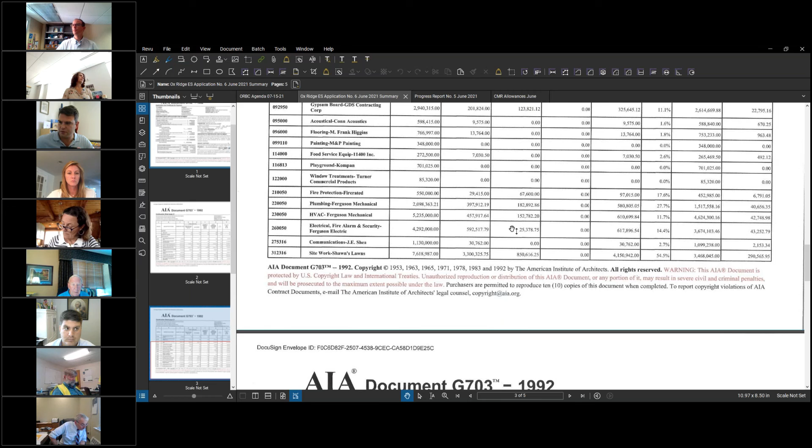Site work, Shawn's Lawns, they've been doing sanitary sewer, storm, backfilling, and that's pretty much it.

Just note on the very first page, it says a summary of the change orders through June was $75,195.

Okay. Is that the amount that has been submitted for Dr. Adley to send over to the state?

Yes, the majority of it is. I would have to check if there was a couple that got processed after that. But I can find that number that got submitted to Dr. Adley. I'm not concerned so much as the number has a document of change orders, which we have to file with the state, but submitted to Dr. Adley for signature.

Yes, it has. Yes. Okay. Yeah, so I believe at this point I signed it, Dr. Adley has it, and then from there Slam has to sign it, and then Jennifer Charneski will have to sign it, and then it comes back to us.

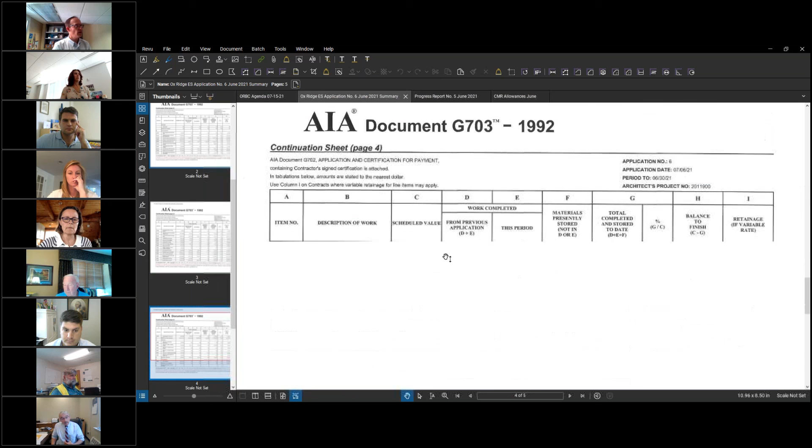And you file it with the state, David? We take care of it. We get it submitted, and then the next step is that in some period of time, anywhere from 1 month to 30 months, the state will review it and will render a response, and they may say, of this change, we have deemed the following amount ineligible.

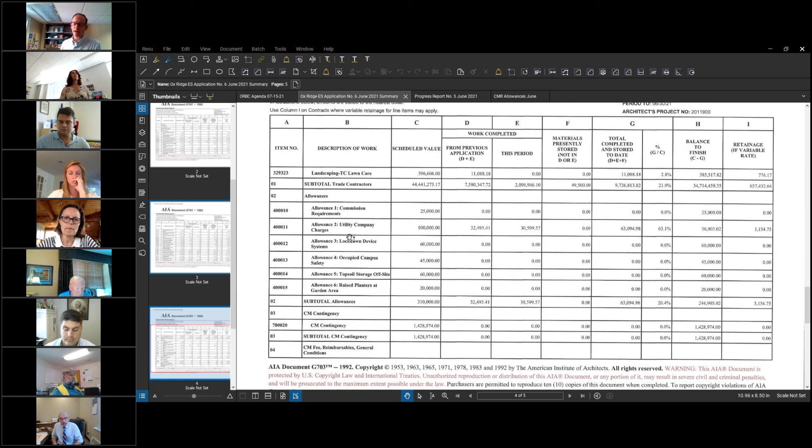Oftentimes they'll come through and say, well, you said all of the changes were eligible, but we deem a portion of it ineligible, and they'll go through the backup and try to find some reason to say it's ineligible. So when we get that letter, the superintendent gets the letter, we will formulate a response back to the state, either agreeing with them or in defense of that, and we'll copy you on that when we send it in.

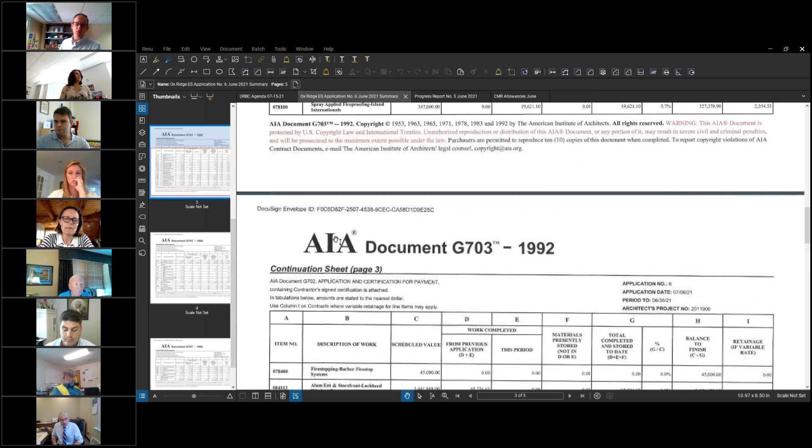But the key is to get the change order signed through all the people and in before that 6-month rule. So I think the oldest date on one of those changes is sometime in February. So we have about a month to get that change order fully signed and into the state to make sure we're within the 6-month rule.

Okay, is there a single person that's responsible for shepherding it through all the signatures and getting it out? Well, I guess on our end, I would say it would be George, but again, I'm not sure who's the one that will get it from Dr. Adley to, say, Jennifer or to Slam. It's somehow we have to get it circulated through everyone and back to us.

Does it have to go to Slam before it goes to Jennifer? It can go in any order, to be honest with you. Okay, that's all I wanted to know.

Well, Mike's on the call here, so I'm going to say, Mike, would you make sure that Dr. Adley gets it over, signs it, and gets it over to Jennifer Chernesky at the town? I sure will. And then that way we can keep the process moving, and then we'll get it back to Slam, or just get it back to you, David, and you'll get it to Slam? I don't care. Just however, I'd say if you get it to George, he can get it to Slam.

Okay, fine. All right, so I'd like to have this payment. Are there any more questions about this application for payment from the committee? If not, I'll entertain a motion to approve the payment of application number 6 in the amount of $2,185,526.54. Do I have a motion?

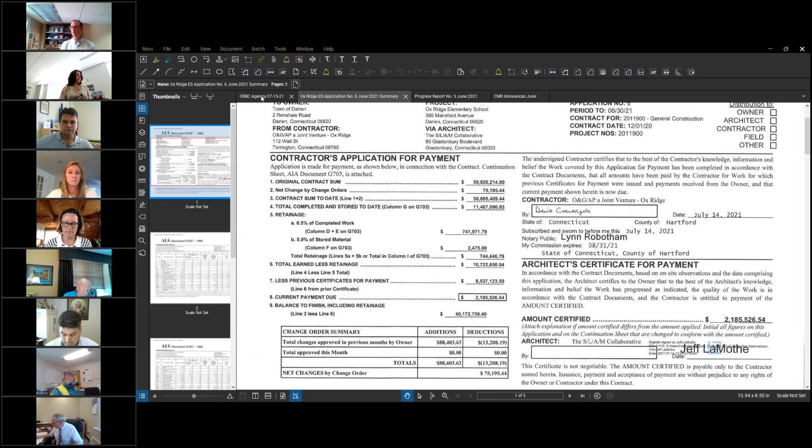Okay, the next order of business is to quickly go through the project update.

It's not going to be in the project update, but the fact that we had one torrential rainfall last Friday, 6+ inches of rain in 6 hours, a record in Darien. That was the official number. But I guess we recovered from that. We had some foundation wash away, but not too much, which is being taken care of. Yeah, that was repaired yesterday. They finished that up. Okay, good.

So that's all set. So let's focus on this report then, George. Okay, just to go through, we're projecting 29% complete in the building, 54 in the site work.

Allowances, we have funds available, 196,061, and probably have a discussion later about the allowances, and then our contingency remains at 1,428,974.

Before you leave that page, George, I just wanted to ask a general question. If you can make that page a little larger, great. In the middle of the page, there's potential and approved budget revisions, and below that, there are potential and approved contract changes. Could you please, or could David please explain what the differences are here?

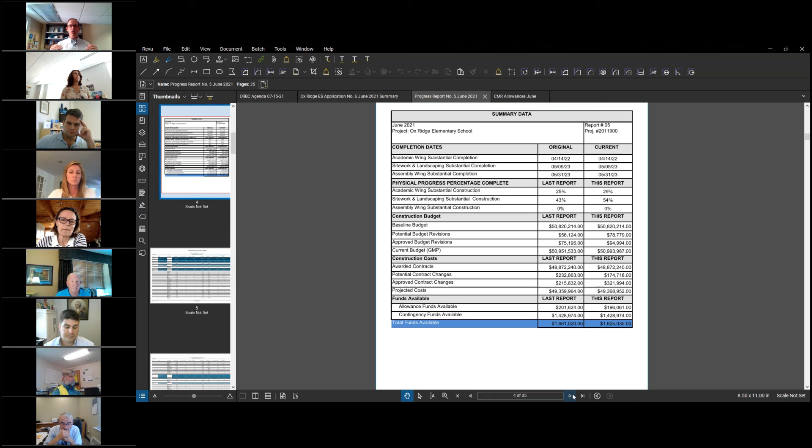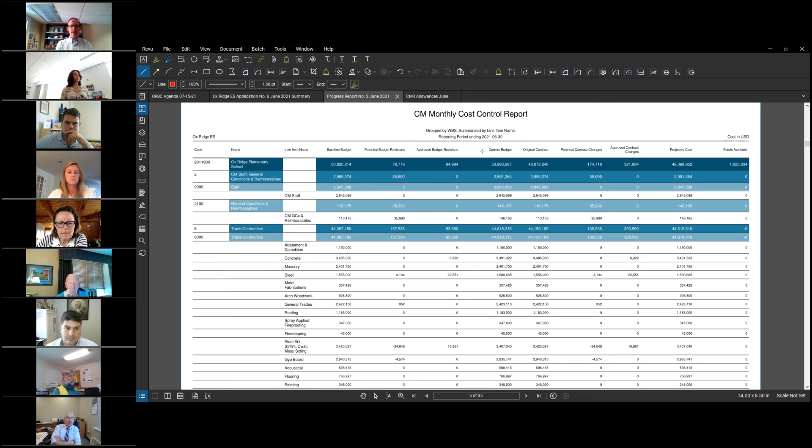If we were to go to the next page there, George, just quickly show where the money will move from. So where George's cursor is, there's a column called original contract, right in the middle of the page, there's a column called current budget and then original contract. If you were to draw a vertical line down that page and take the left-hand side, that is our contract with the town of Darien.

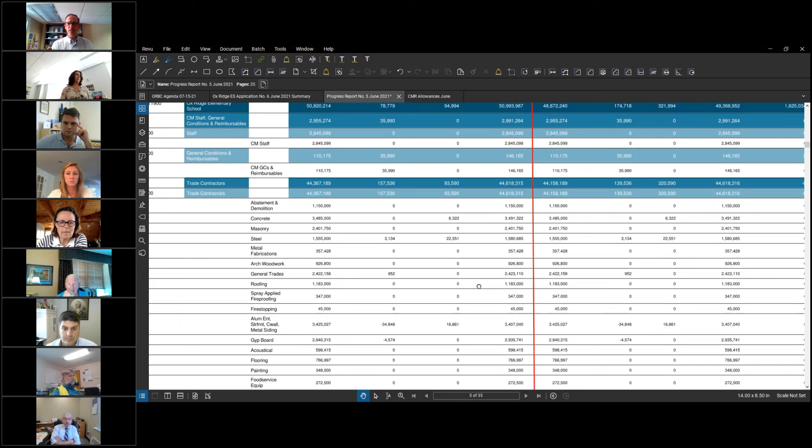From that line to the right where it says projected cost, the second to last column on the right, that is what we have contracted with our trades for and what you've contracted with us as far as George, myself, Brian, all that stuff.

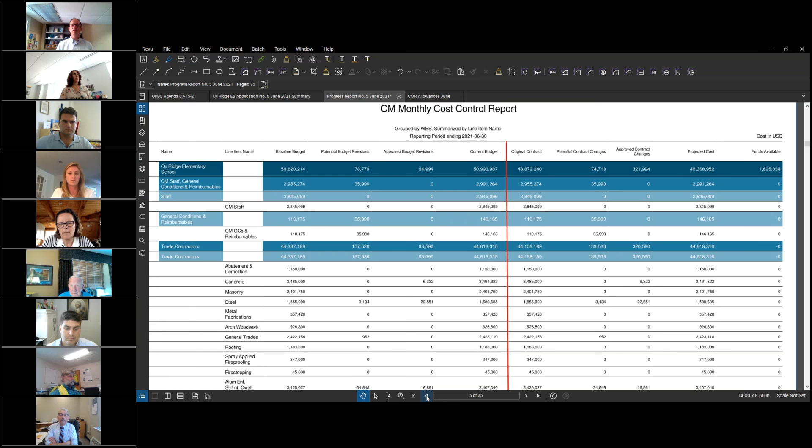And then the very last column is funds available. So what that does is it takes our current budget, which is the column just to the left of the red line, and it takes the projected cost, which is the second to last column from the right, and subtracts the projected cost from the current budget, and that's your funds available, which if you look at the top right corner, that 1.625, that's the funds available within our GMP, and that is the amount of the allowances and contingency that we have available.

To Nick's point, since these contracts include allowances, that's why you see that number going down. This number would go up, but these would stay the same, only because the allowances are part of that GMP. In other words, our contract with you won't go up with these allowances because they're all part of our GMP.

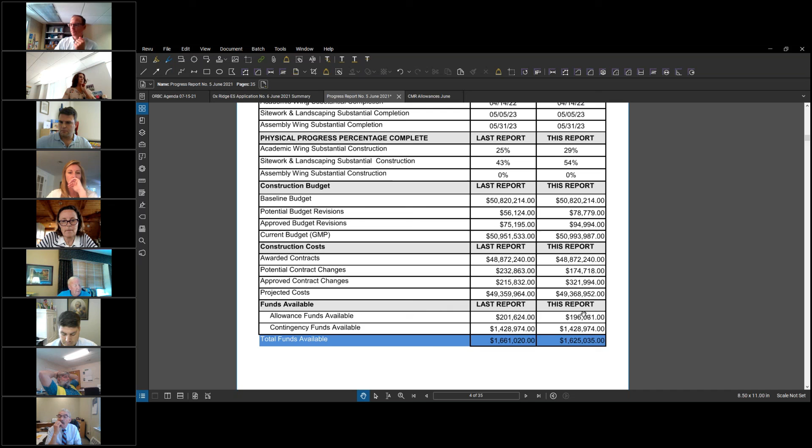Well, I hope that was helpful. I hope the rest of the committee found it helpful as well. That does help explain it. Okay.

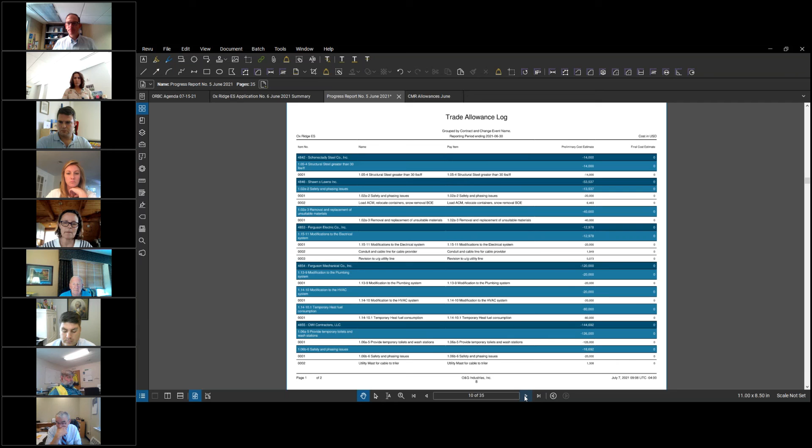Just going through cost schedule impact items. Primary electrical feed - we've kind of worked through all the bugs, if you will. Eversource agreed to install a new primary feed to the existing transformer. That's due to the fact that they couldn't shut off the direct burial cable, so in order for us to do our work safely...

We had to put in 2 vaults and then a conduit, and Eversource is going to have a feed to that existing transformer. On that part of the work, we also moved the pole over across Mansfield Ave so we don't have to put in 2 switch boxes, and then we're going to cross Mansfield Ave and bring the cable down to the new building. That work started yesterday, going from the switch vault down below the road and up the road.

Water main revisions - we made some revisions from the 8-inch. The original contract actually showed an 8-inch line going down the middle of the driveway, and showed tying into the existing 4-inch line. Obviously we couldn't do that, so we had the option of tapping a new 8-inch line into the 16-inch main in the street, or running separate 4 and 6-inch lines down the street.

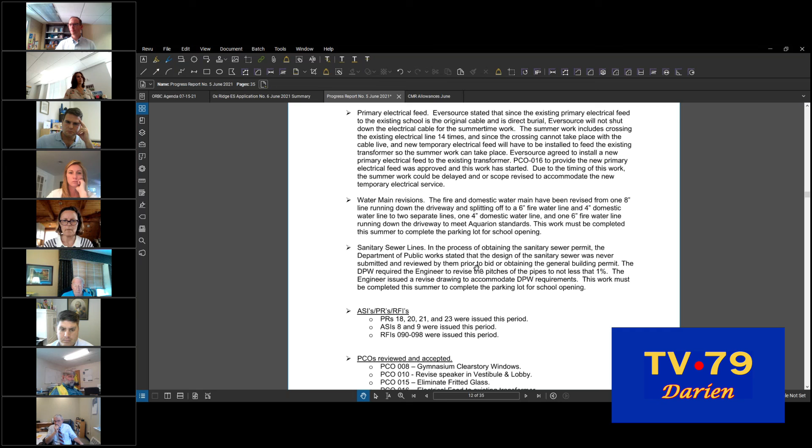And then the sanitary sewer lines - I guess last week or the week before, when the building inspector came out, he mentioned that we needed the sewer department to inspect all the sanitary sewer lines. So when we reached out to the public works sewer department, they said we needed to pull a permit, and also that they hadn't seen the design drawings. So we gave them all the design drawings, and they had a couple of issues with that, and made some revisions to the piping because there were some laterals that were less than 1%.

The town standard is 2% pitch on the pipe, but if you have extenuating circumstances like we do, where we have an existing invert in the pump station and also the invert of the new building, we couldn't achieve the 2%. So they said we could go to 1%, but not less. There were a couple of those runs that had to get adjusted to 1%, which meant adjusting the heights of a couple of the manholes. So we did get the permit Monday.

They've set manhole 5 the other day, yesterday, and we have about three pieces of pipe in now. So that's kind of started. Now the inspector, and maybe I'll mention it now, Kip, the inspector was out here.

It wasn't Ed Gentile, but a Darren he sent out to inspect. Darren's number 2. Darren told us he's going to look at all the pipe installing going in, and we're saying we're going to need him out here every day, even Fridays and some Saturdays, to inspect the pipe so we can keep moving forward.

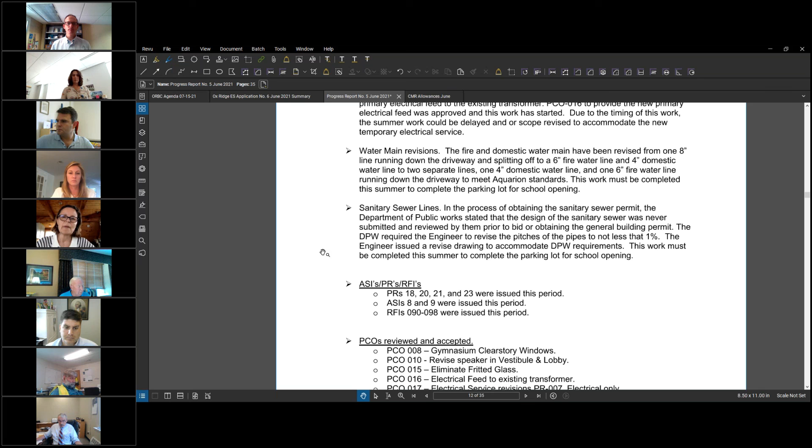This is Diane. I have a question, mostly for Amy, but also for you George, as to whether all these changes have had any implications on any site design. Does it change some elevations or landscape, natural landscape, or any of the parking layout or anything like that? I know there was talk at the last meeting about locating the tank in a location where it could be accessed, and I just want to make sure it was being coordinated through to the final design of the landscape, that everything was being coordinated.

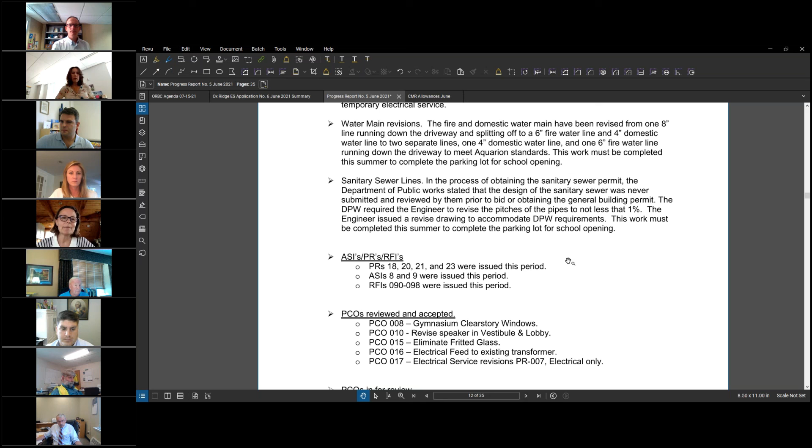Yes, it is, and this is all underground, so it doesn't affect landscaping or parking lot layout at all. All of this stuff is all underground. And everything gets run through the design team anyway, all of these changes, for approval before anything goes.

The one thing that might have changed a little bit is where the fill pipe and vent pipes are on that tank that you mentioned, but that's very minor and it's further away from the building. It'll still be located in an island. It just might move north south, something like that, but still be located in the island, so it shouldn't affect any of the new parking or sidewalk or anything like that.

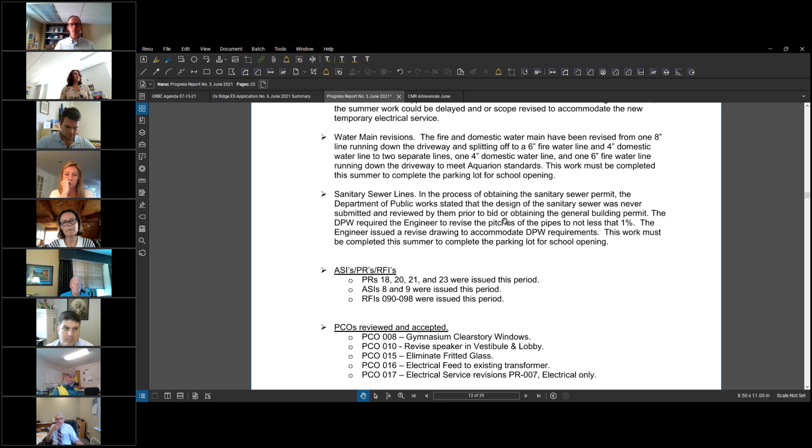And then the sanitary lines, those are 18 feet below the parking lot, and the water mains are 5 feet or so.

Yeah, Darren went down in that hole. I was surprised.

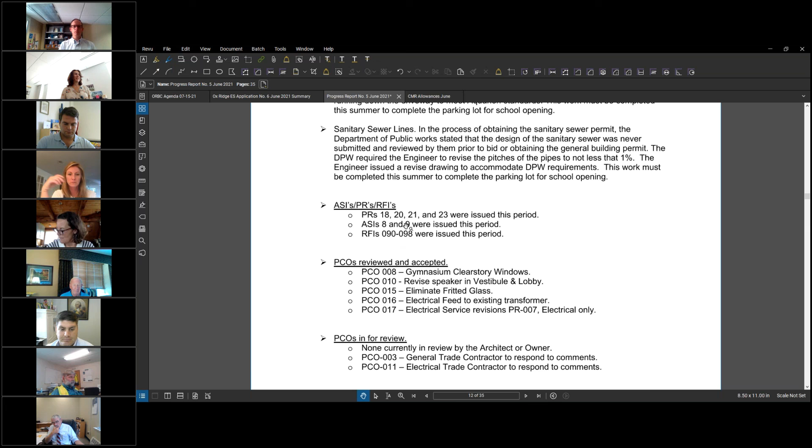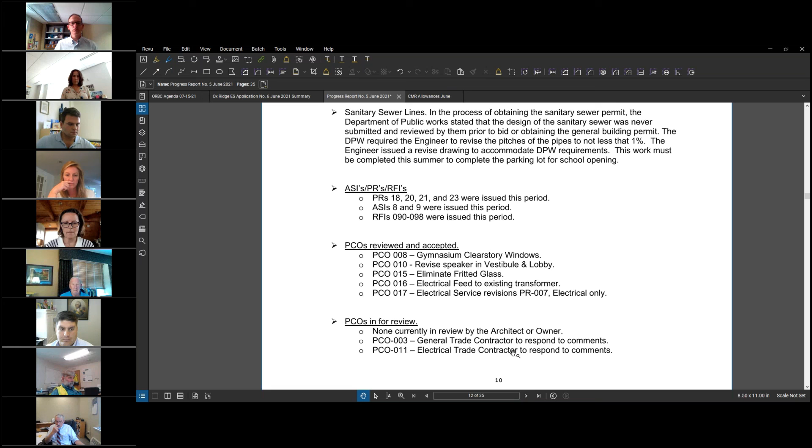So ASIs, just 4 proposal requests issued, 2 ASIs, 9 RFIs, but none that are outstanding, they've been answered and responded to quickly. So we're good. PCOs, we had 5 that were reviewed and accepted, change orders written, and then there's none currently with the architect or owner. There's 2 PCOs that basically got rejected, but they'll get closed out, just waiting on some responses from the contractors.

I would just like to add, for the committee to understand, one of those rejected potential change orders came from Ferguson, looking to put their hangers for the various pipes in the ceiling, with the hangers attached to the roof. It was going to save them time from putting in angle irons to hang things from. They went back to Slam, and Slam said no, the load on the roof has not been properly designed for using hangers as well, and it got rejected. So this goes back to what Diane was asking about - all of these changes go through the process of being reviewed by Slam before they're approved. Here's one that was not approved, and it's been rejected, so they're back doing what they were originally told to do and had contracted for. They brought the angles and are hanging their hangers off the angles. I just wanted to use that as a story about how the process works. It seems to be working, but we're trying to keep our eyes on all of it.

And then just some schedule activity revisions. We talked about the new primary feed, the fire domestic, and the new electrical feed. So all that's been incorporated into the contract and into the schedule, and kind of resequenced, so it doesn't really show an impact on the end dates.

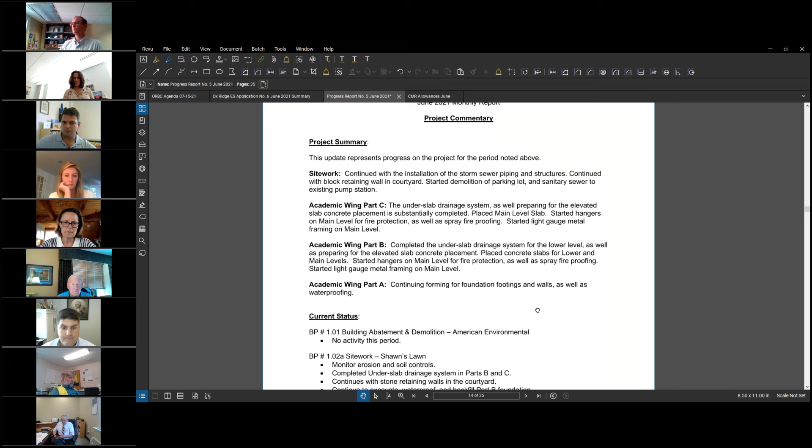Project summary: site work, continued installation of storm sewer piping and the structures, block retaining wall in the courtyards, and then they started the demo of the parking lot and sanitary sewers, pump station. Academic wing, under-slab drainage complete.

We placed the main level slab, started with the hangers, and we've actually placed the lower slab on C and B a couple weeks ago, then started the light gauge metal framing on the main level, and kind of the same with B as well. The slabs have been placed, main level, lower level, and then started the framing.

In A, continuing forming foundation walls and footings, and there's one more high wall left to place, which I think they're scheduled to pour at the end of this week, and that would complete the foundation of A. Monday, we have Schenectady scheduled to come and start erecting the steel for A.

Can I just ask a quick question? Can you please just remind us all of what differentiates part A, B, and C?

If you look at the design drawings, they break the building up into part A, B, and C. Your lower level, part A, is the mechanical spaces - that's where you'll see the fire pump, the electrical rooms, all your mechanicals. That's the area with all the high concrete walls. C is kind of next to that, then B, going counterclockwise around the building. C goes halfway on that lower level from A, then continues counterclockwise - so C is the next part, then B. Up top we just have, on grade, B, C, and A.

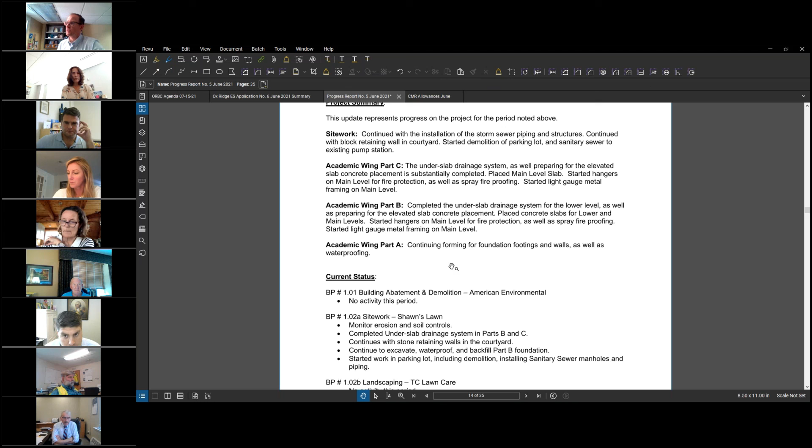Obviously there's a lower level stacked beneath it. But again, as Amy was saying, that was the delineation they gave to be able to fit portions of the building on the documents with a usable scale. So that's how we've delineated the work. If you look at the planning boards in our field office, they're differentiated by these areas as well. So that's the graphic.

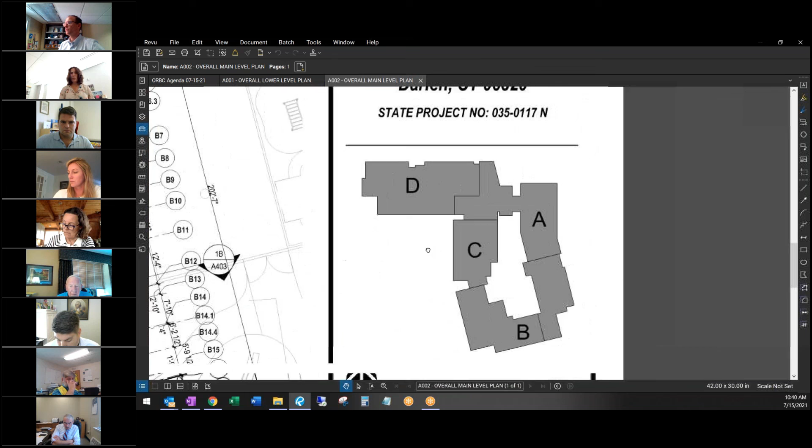You'll notice the column lines, and that's kind of how we delineate a lot of what we do with construction and all that - those column lines. So here, B is on the right - that part. We know B is part B, and A is part A. That's kind of how we base the direction of the steel, any type of scheduling, all that, on those numbers. But at the end of the day, the end user won't see them or use them or anything like that.

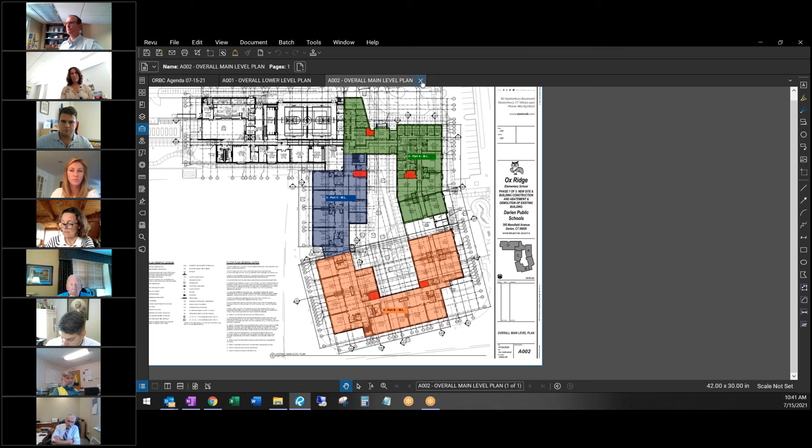Okay, thank you for going over that again. I just wanted to make sure. George, as a follow-on to Katie's question - then we talk about Schenectady Steel coming back in. They're talking about doing the steel for section A, correct?

That's correct. That'll be on the high walls. And that A also includes the deepest part of this structure, which is all of the mechanical rooms way down below - that's why we have those very tall cement walls. And that's that one wall - that's where we had the washout, the slope going from the top to the pit there, where that washout was.

George, you'll have to go back to sharing your screen again because I interrupted that.

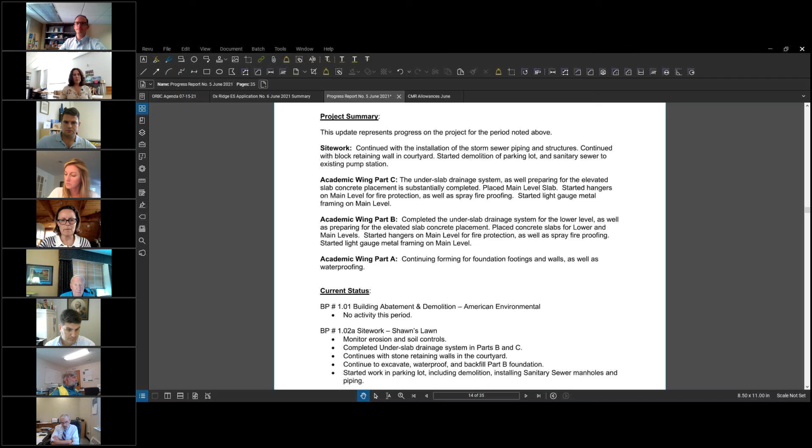I think that pretty much covers it, doesn't it, George? Yeah, I think that pretty much covers it. We just have the CPM schedule and then some photos. So yep, that pretty much covers it.

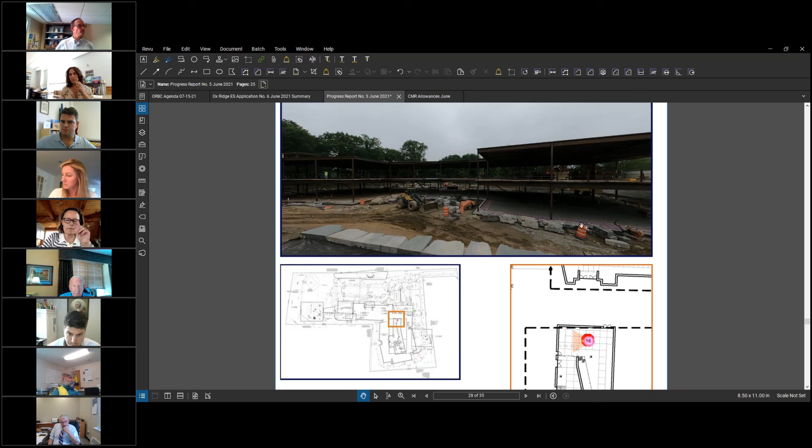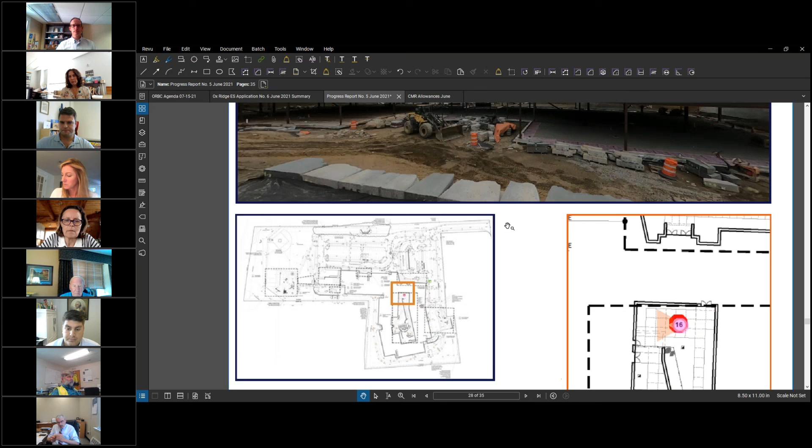So now we've had Multi Vista. They'll come out once a month, and if anybody wants access to that platform, we can give that to them. It's a platform where they post pictures. They'll go around the site, not only exterior but interior too, and post pictures every month at the same view, so when you go in there, you can click that view and it'll show the pictures for each month.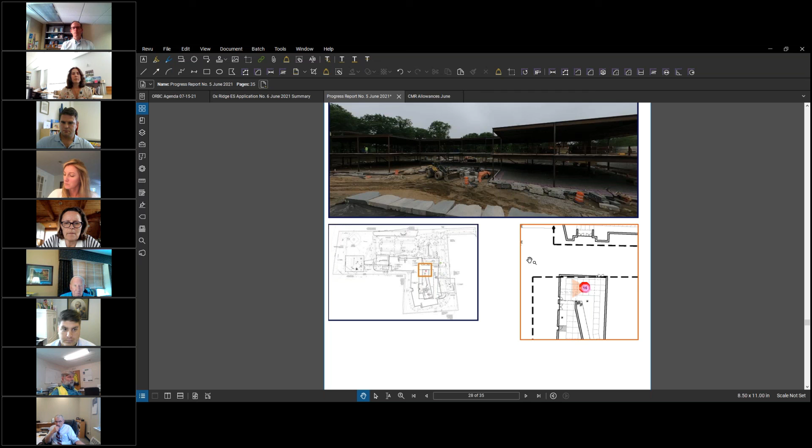So we started that, so that's what you're going to see. You'll see the picture, and you have the ability to see where that picture's taken in the view. We can give you access to that platform so you can go in anytime and look at the progress photos. It shows the different views for that.

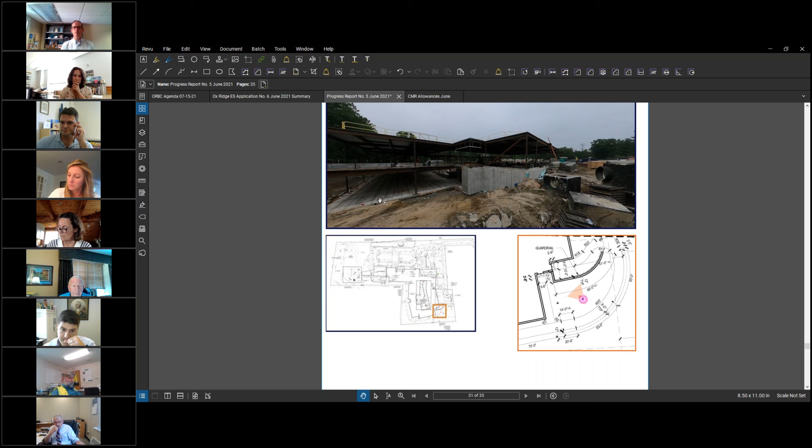So that's A looking down towards B. That's B before we poured the slab, and you can see. That's it. Is there any other questions? All right, thank you, George.

Our next item of business is Nick was going to help try to explain this concept of allowances so it's a little bit clearer for the committee, so as we talk about them from month to month, or in our OAC meetings, we can at least get a picture of what we're talking about and get a good feeling about how it's being used. So Nick, it's all yours.

Sure, thank you. We briefly touched upon this earlier in the meeting, but essentially the allowances are dollars built into the GMP contract with O&G, and they're for various items identified that we may or may not need. So the money's there if we need it. They'll ask our approval to spend it when they need to, and if they don't spend it, it goes right back to us at the end of the day. If they do spend it, they will then write a contract change order to their subcontractors. That's the whole difference between the budget versus the cost side of things, our money with O&G and their costs with the subcontractors.

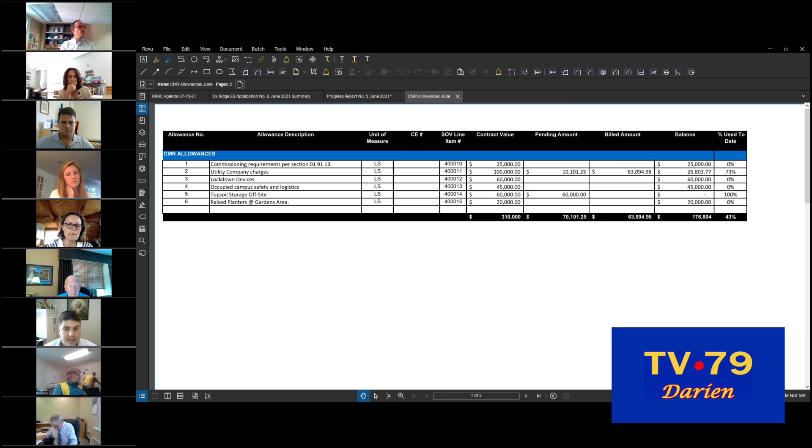So there were several items identified and not purchased with the bids, and you'll see these carried right here. There's 6 of them, one being commissioning requirements, labor at the end of the job when they were going to commission all the mechanical units, right? They could track that T&M against it and draw from that. Utility company charges, same thing, they're drawing down from that.

So it looks like there was 310,000 originally included. It looks like there's about 176,000 committed. I think the biggest one was the topsoil issue, which was taken care of through that. So that's pretty much the gist of it. I don't know if George, if you have anything to add to that. No, I think that's good.

Yeah, so when these dollars get spent, it's not in addition to the GMP. It won't be a contract change order to us. So it's already kind of money approved, if you will, from that perspective, so it doesn't increase our overall number there. Correct, and again they're tracked on this report and reported on monthly, and when they need to get spent, they come to us for approval. It also doesn't affect the contingency, our contingency.

Correct, right. These are above and beyond our contingency. It won't affect the owner's contingency unless you go over the allowance, then it would follow the normal change order process. But it's all part of the base contract with us, the GMP. Are there any questions from the committee on this?

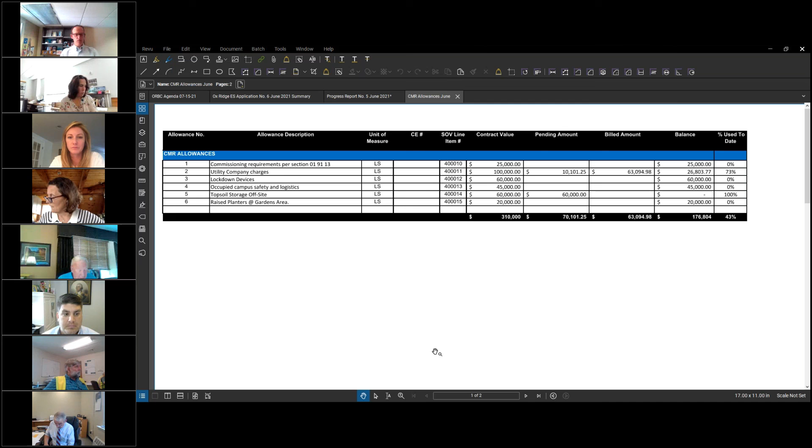Okay, let's move on to the next item of business, which is discuss the ombre pattern of the dark gray bricks on the bus loop. I want to give some quick background on this and then open it up for Diane, Amy, and Sean to talk about the dark bricks.

We have approximately, in the design as it currently exists, about 55,000 dark bricks. Of that 55,000, over 40,000 are to be put on the academic wing in parts in the back around the side of the building, which really are put in as a solid grouping to create breaks of pattern in the wall of the exterior. I never realized that over 40,000 of the 55,000 bricks were really being used around the academic wing. The balance, maybe 13,000 or 14,000 at most, are related to the ombre pattern on the assembly, which is the gymnasium and the cafeteria.

The supplier has produced so far 40,000 dark bricks. So we have a choice to make right now: only make enough more bricks to do the dark brick pattern around the academic wing, or make the full 55,000 to use as the ombre pattern on the gymnasium, the assembly wing.

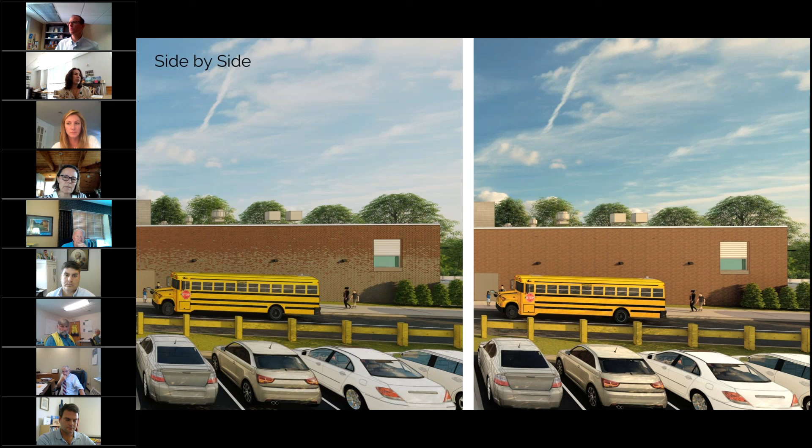And those are the examples we pulled, and here's a side by side for you. This happens to be a cropped image of those renderings.

Amy, I was just going to say, I think it's helpful to see that picture of the Rhode Island school, because I don't think the renderings do the coloring justice for this. Agreed. Yeah, I agree, Nick. I mean, the brick that's selected there is slightly different than this one, but we do have the examples of the brick that

Everyone can look at. And I think the mock-up, correct me if I'm wrong George, there's one mock-up in progress now, and then you're going to do a mock-up with this gradient pattern when you get closer to building area D, right? George, I think you're muted. Yes, that's correct, Amy. The mock-up out here is the academic, and then we're going to do a similar mock-up for the assembly.

But that's not to say - I've got to see if we have wall space. If you want to try the ombre pattern on this mock-up, if that would be helpful. But there's windows, they would be broken up. Yeah, I'm not sure if there's room, because we do want this mock-up to be a true mock-up for the portion of the wall that you're building sooner.

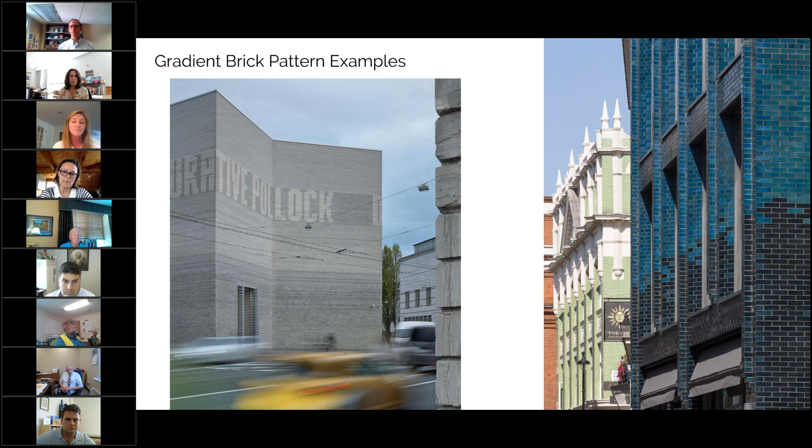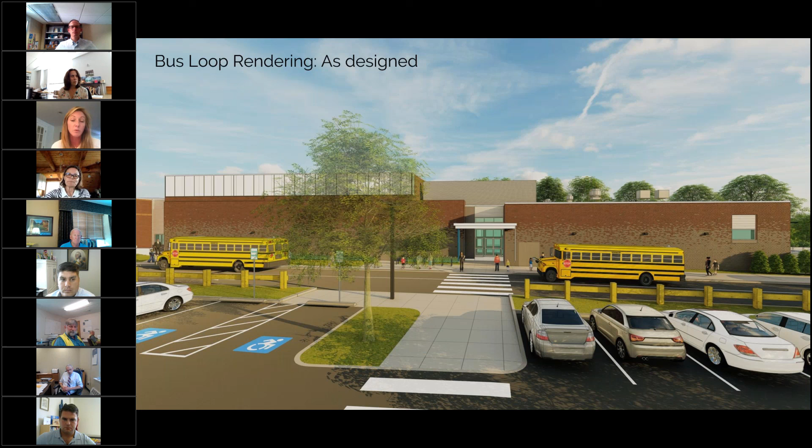I would also just like to say that I think there is an in-between option. I don't think that we have to go - I like the idea of landscaping, I always do. But I also think, were we to put in a banding of sorts, that's something that has been done at the Darien Library, at the high school. I would hope that we wouldn't have to leave it just a completely solid brick wall.

But my two cents is also that I feel like this was something that kind of happened because we were trying to solve for other problems and then kind of just got stuck in there. And I just had the feeling that there was a lot of unease amongst the committee about maybe not being a first choice of design.

I don't know how this gets handled. Is there another vote similar to during the design phase? I don't know what happens here, but I would agree with Katie that if you were to select all red, I would highly recommend a brick pattern be applied, whether using that same gray brick to match the other areas of the building and have some banding, or a pattern.

Another option, which I had considered as I was putting this together last night, is looking at the example that I showed you at McGuire School, where the color that goes from dark to red really occurs much lower on the scale of the wall.

Rather than using one full story, or basically solid up to the doors, about 6 feet, and then it starts breaking up and going all the way through red, could we do a band of solid starting at the floor level up, say 3 or 4 feet, and then turn to red more soon in the wall, so that there's a larger portion of red, which seems to be the preference.